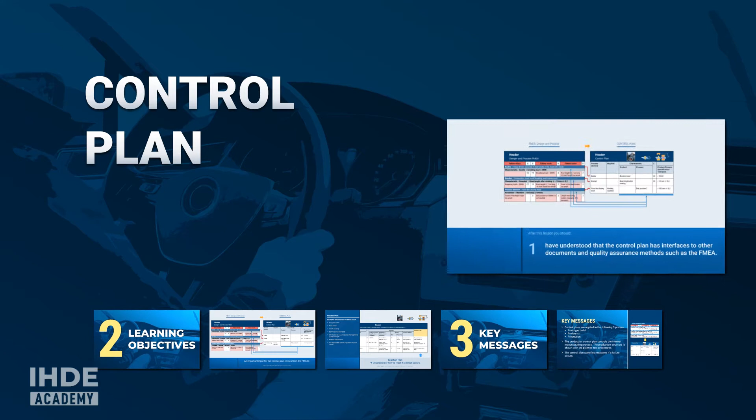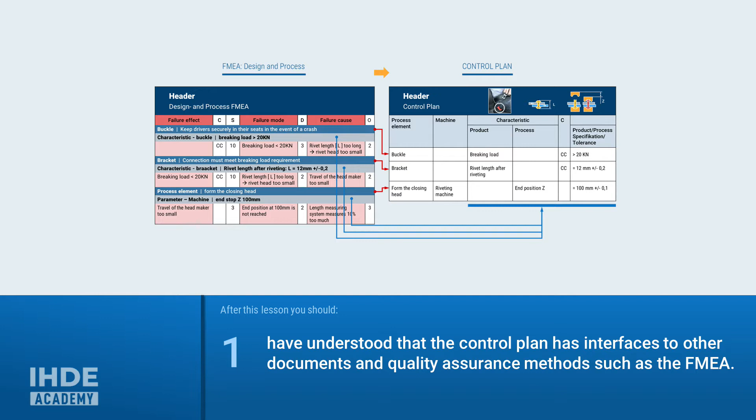And hello again to this lesson, which essentially has two learning objectives. In the end, you should have understood that the control plan has interfaces to other documents and quality assurance methods, such as the FMEA. And of course, you should know when and how a control plan is used and what elements it contains in order to then be able to create one yourself, or to collaborate in the creation of one, or just be able to use it properly.

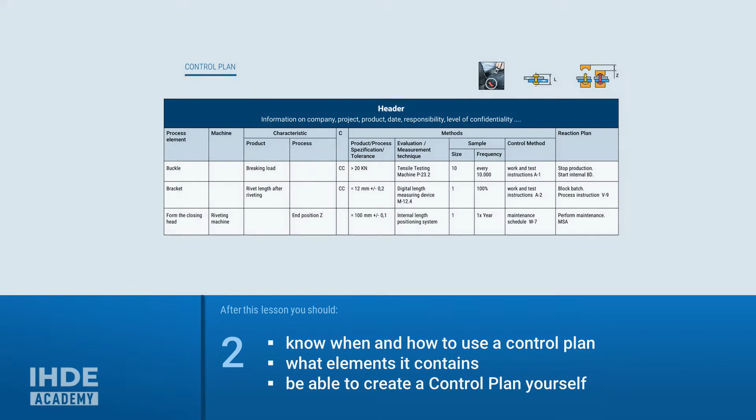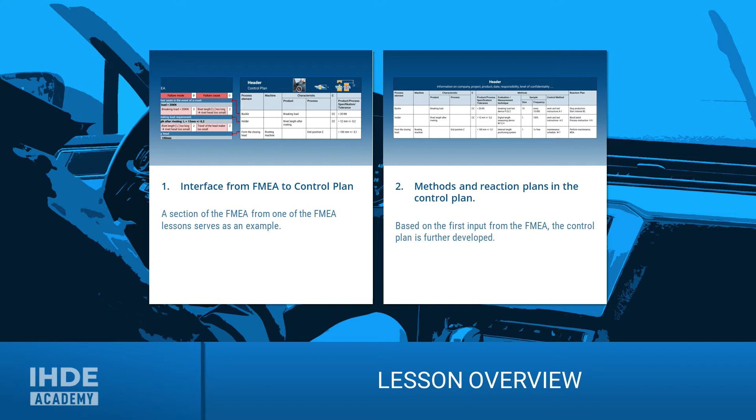This lesson is divided into two chapters. In the first chapter, we look at some interfaces to the FMEA. In the second chapter, the control plan from the first chapter is developed further and the various elements are explained in more detail. Let's start with the interfaces between the FMEA and the control plan and start the creation of the control plan.

At this point, it must be assumed that basic knowledge of the FMEA is already available. If this is not the case, there are separate lessons on product and process FMEA available. A small excerpt from one of these FMEAs is shown on the left. Any product or process can be broken down into smaller elements, commonly called system elements. This section of the FMEA contains some system elements.

Firstly, a buckle, meaning the buckle of a seatbelt in a car. Then a bracket, which is a subassembly of the buckle. And finally, a process element for the riveting process. Functions and/or characteristics are assigned to these system elements. One characteristic of the buckle is that it must withstand a breaking load of 20 kN.

If we now look at the first part of the control plan on the right-hand side, it begins with the process elements. What was a system element in the FMEA becomes a process element here in the control plan. Accordingly, the system elements buckle, bracket, and the process element forming the closing head of the rivet can be found here. If a machine is required to produce a characteristic, then this is to be inserted here in the column Machine, preferably with a more detailed machine description.

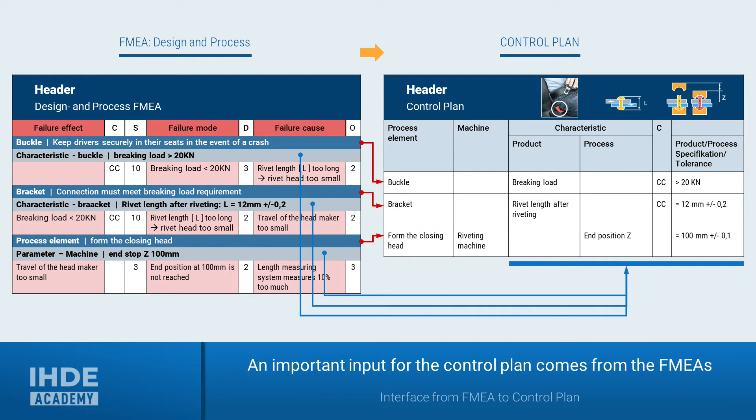After we have just transferred the first data or information from the FMEAs to the control plan, we now continue purely in the control plan with the methods and reaction plans.

All columns of the control plan are shown here. On the left is the content from the first chapter, which comes from the FMEA. To the right of that, we have the columns for the methods. Methods in this case is everything that would be needed to check the characteristics or functionality. This includes the test equipment, information on the size and frequency of the sample, and the control method, which we will go into more detail in a moment.

The reaction plans will then be found on the far right. As far as the header of the control plan is concerned, let's limit ourselves to stating that it must contain the usual information on the company, product, responsibilities, release status, and the like.

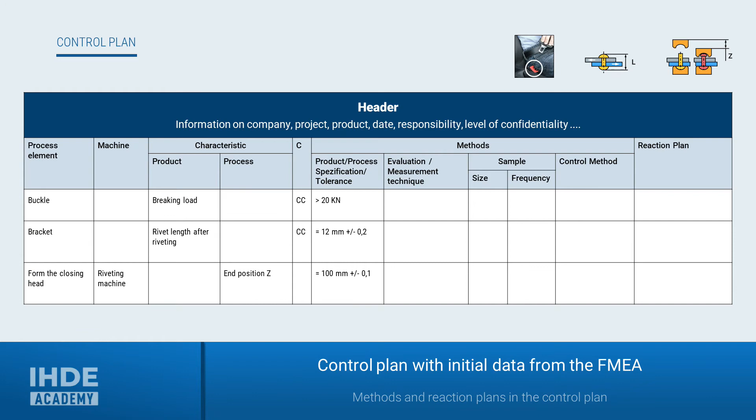The characteristics or functions listed before must of course be checked. The test equipment used for this must be listed here for each characteristic. A test can be carried out subjectively through a person's sensory perception or through objective tests. Measuring and gauging fall under objective tests.

These test equipment should be subject to test equipment monitoring, and it must be suitable for the intended purpose and use. This means, for example, that the measuring range, the resolution, the precision, the measurement stability, etc. must be suitable. Such proof can be provided, for example, by a capability study for the test equipment. Keyword MSA for Measurement System Analysis.

For our example, a tensile testing machine with a measuring equipment number P23.2 is used to check the breaking load, and a digital length measuring system is used to measure the rivet length, etc.

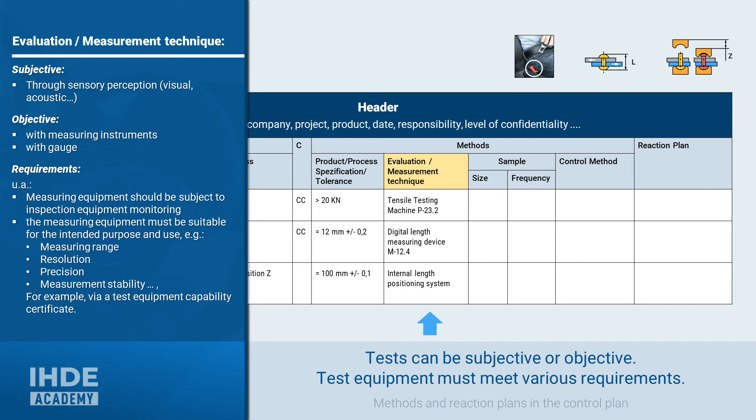Next, it must be determined how often a feature must be checked. Of course, one must consider whether it's a destructive test or not. With destructive tests, such as for the breaking load, you can of course only check random samples. The determination of the sample size and the frequency must be based on the severity of the failure effect, the probability of occurrence, and the probability of detection of a failure.

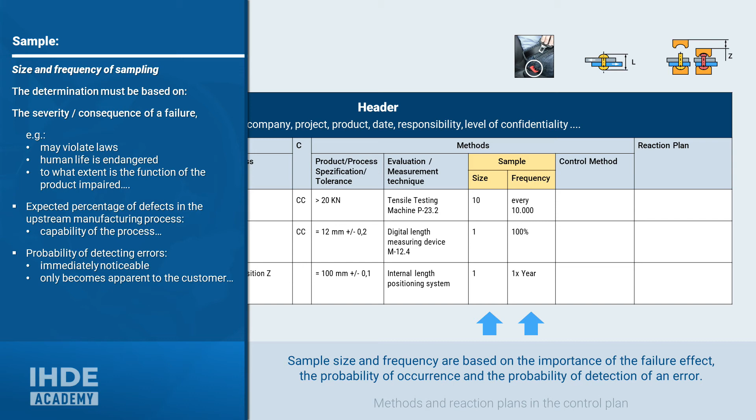For this, you must again look at the FMEAs. Measures for monitoring the characteristics should already be defined there, considering the failure assessments. The FMEA could have shown that it is sufficient to subject 10 of every 10,000 parts produced to a static breaking load test. Or, as here for the length of the rivet, testing of 100% of the parts could be required.

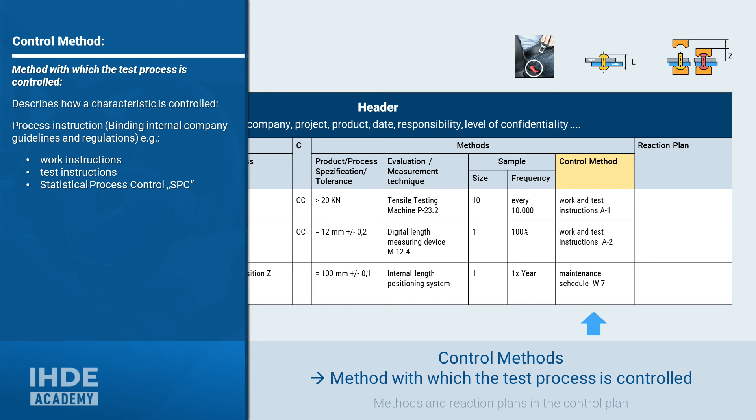The control method is the method by which the test process is controlled. This could be, for example, procedural instructions. Procedural instructions are any kind of binding internal company guidelines and regulations. For example, work instructions or test instructions. A maintenance plan can also be included.

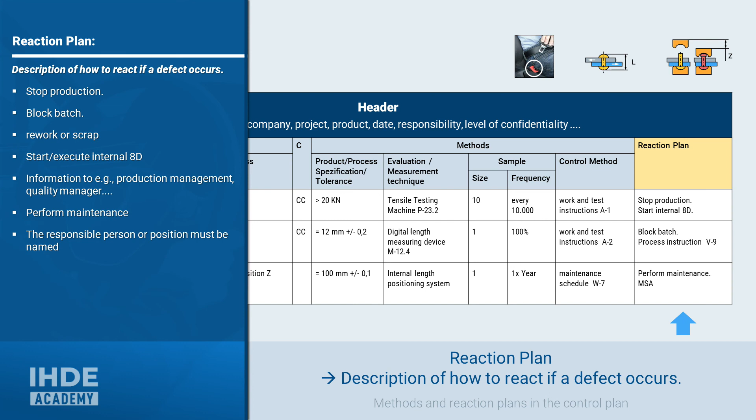In the reaction plan column, it is, for example, entered how an employee has to react if a defect has occurred. For example, it can be stipulated that the production must be stopped immediately. Batches can be blocked, or defect parts can be reworked or scrapped. An 8D report can be started, or the information that a failure has been detected simply needs to be passed on. Responsible persons or positions should also be named.

Finally, we come to the question of when a control plan should be used. A distinction is made between three phases, in which the methods and reactions differ. A control plan can be used during the manufacture or testing of prototypes, or during a pre-series. With these two, the sample size and the sample frequency will certainly be higher than during series production in the series control plan. So, one differentiates between the prototype control plan, the pre-production control plan, and the production control plan.

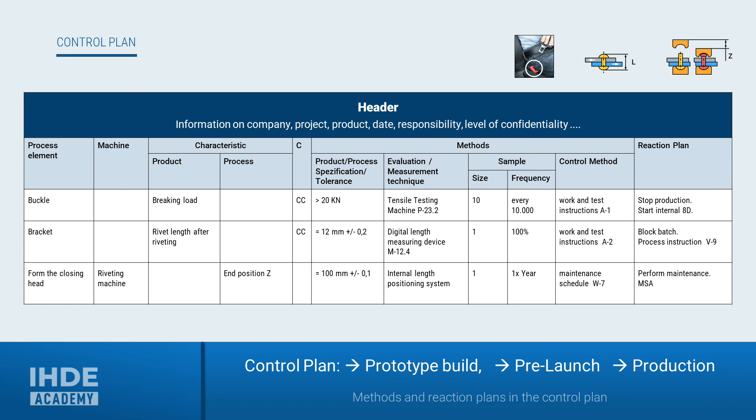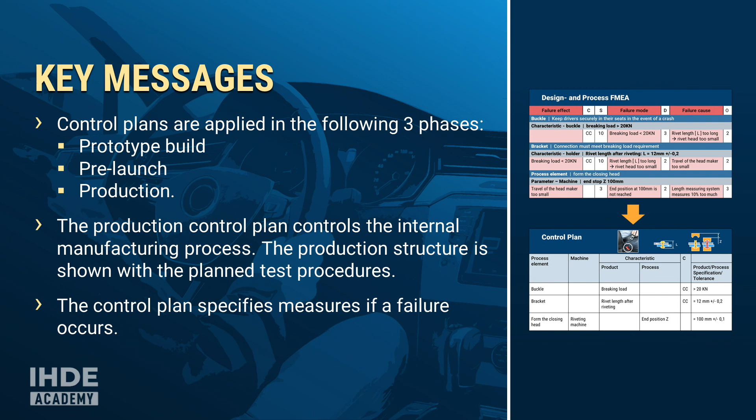Well, that was a lot of new information. Therefore, I would like to conclude by repeating the 3 most important key messages. Control plans are applied in the following 3 phases: prototype build, pre-launch, and production. The control plan controls the internal manufacturing process. The production structure is shown with the planned test procedures. The control plan specifies measures if a failure occurs.